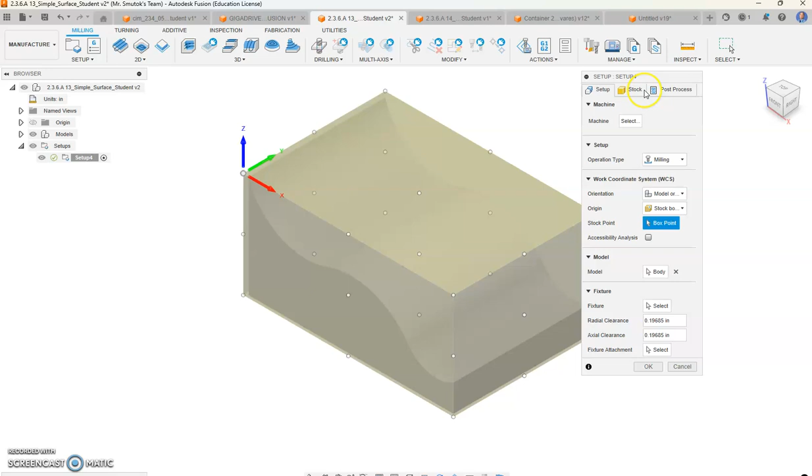So our two-dimensional toolpaths, which is everything over here in this tab, relies on the bottom surface being flat. Three-dimensional toolpaths is what you're going to need for this ski hill and for the next model too, which is a complex surface. So I'm going to jump right in here and we'll do a setup quickly. And I'll get right into it with the 3D.

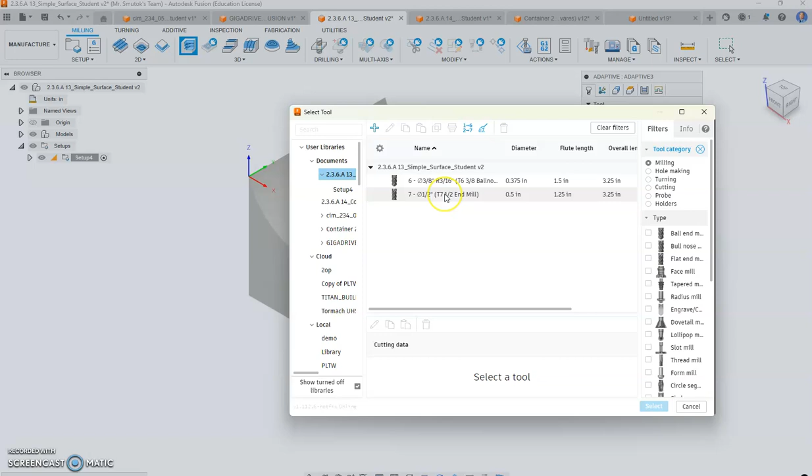I like to use adaptive clearing, and what this strategy is going to do is it's going to quickly remove a bunch of material. Speeds and feeds for simulation is okay. Geometry, you don't need to actually select anything. You could select these guys here. You could choose faces, and then we'll select these faces. Our action is going to be to machine the surface. I'll choose OK.

Essentially what this is going to do is it's going to look at the part, figure out what it thinks you want to machine, and then figure out the most efficient way based on tool geometry and tool diameter using this right here called optimal load. So if you don't have optimal load selected or adaptive selected, what you're going to get is what you see on the bottom left there, where you've got a large amount of your tool engaged in your material.

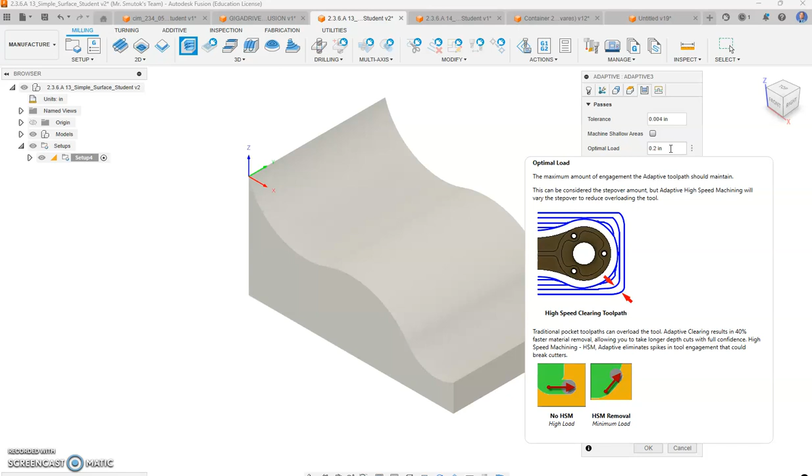Well, that is okay if you're not cutting very deep. That's okay if you're not cutting very fast. But for this, we want to remove this extra material as quick as we can, and we want to not damage our tools when we do it. So we're going to use this, and I definitely want to check off stock to leave. I want to not cut all the way down to my final surface because this is a roughing operation. We are not going to be done after this. We have to go back and fix it or finish it.

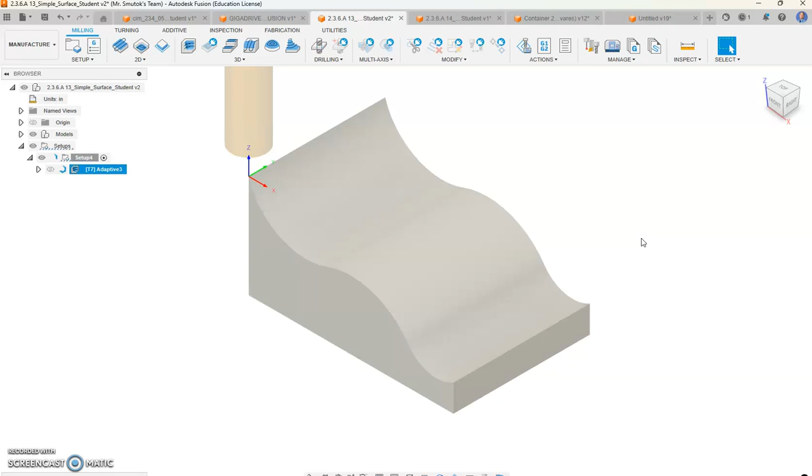So I'm just going to choose OK and let the machine chug its way through this, and you can see its toolpath there. Looks okay. Fusion does a good job of giving you a simulated look of what it's going to look like after it machines all of this. So again, my rapids are in yellow, my greens are my linking, and my blue is my cutting move. So as you take a look through this, you see we're getting most of the material off, but we're leaving some stair steps, which is not our smooth finished ski hill.

To check our machining time, we'll right click and choose machining time, and we can see this takes 4 minutes and 5 seconds to go through based on the speeds and feeds that I didn't adjust. So adjust accordingly with your machine and material and tool selection.

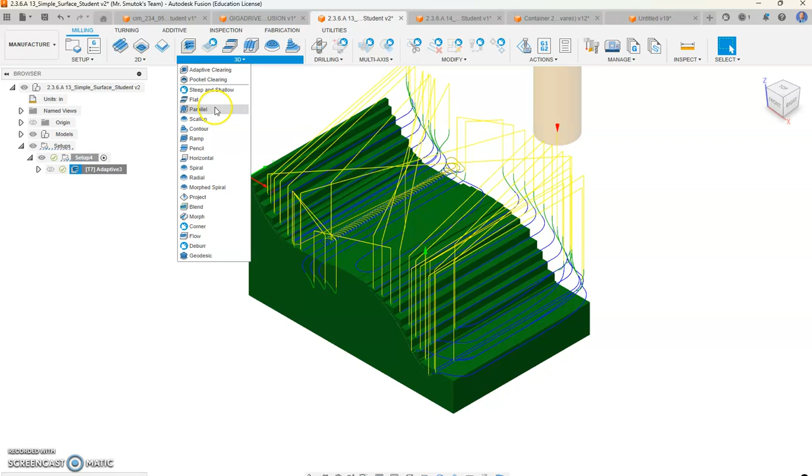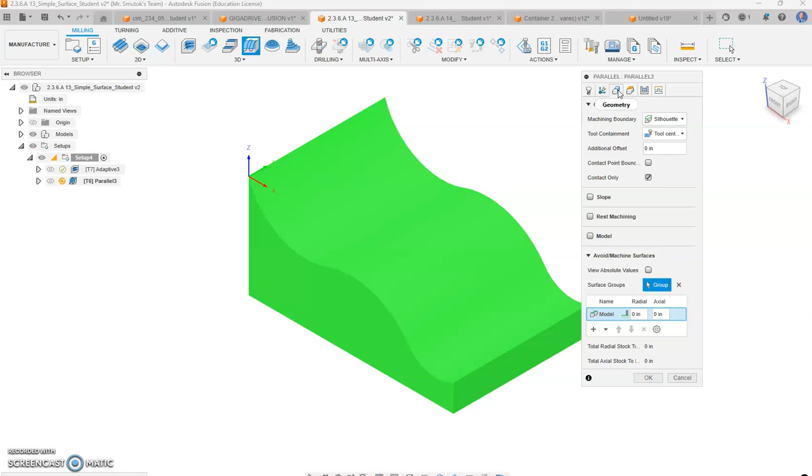Now that we've got most of the material removed, it's time to go back and actually smooth this out. So I'm going to come in here and choose a parallel toolpath. Anytime you're doing a three-dimensional finishing operation, you want to use a rounded tool. So I'm going to switch over to my 3/8 ball end mill. Geometry I'm going to leave alone again. Heights I'm going to leave alone. Passes, you got to play with this step over here. The default for Fusion is probably going to be half of the tool diameter.

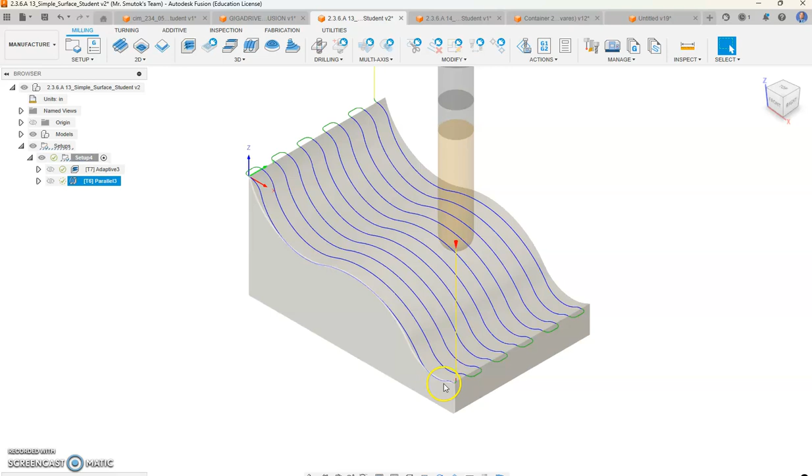So if I do that and I type in 0.1875 for half of my tool diameter, you can see that it's going to do like cutting the grass. It's going to go up the hill, over, down the hill, up the hill, over, down the hill, which is okay. However, if you zoom in on this, you're actually going to leave these cusps here. You're going to leave these ridges. If that's what you want, then you're good. Unfortunately, that's not what we want.

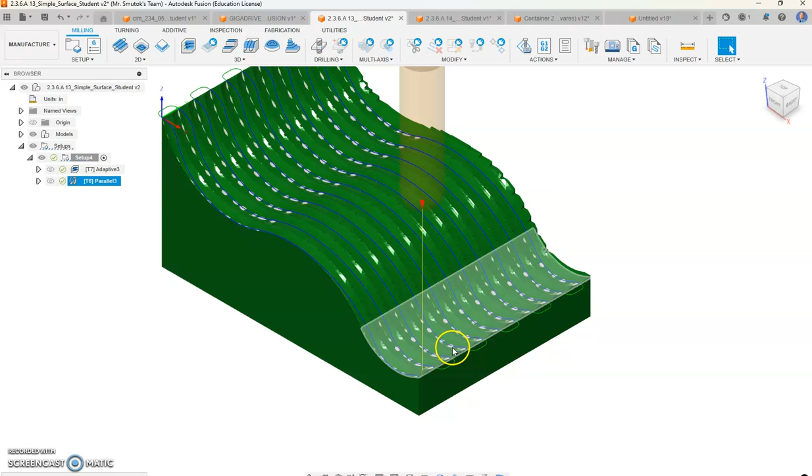We want to try to smooth this out more. So the way we're going to do that is by adjusting our toolpath to make these step over lines closer together. So I'll just come over here, double click to edit my toolpath, come over to my passes, and I'll change that to say 20 thousandths. Now you can see it's going to go up the hill, down the hill a lot more times, which is going to give us a smoother surface.

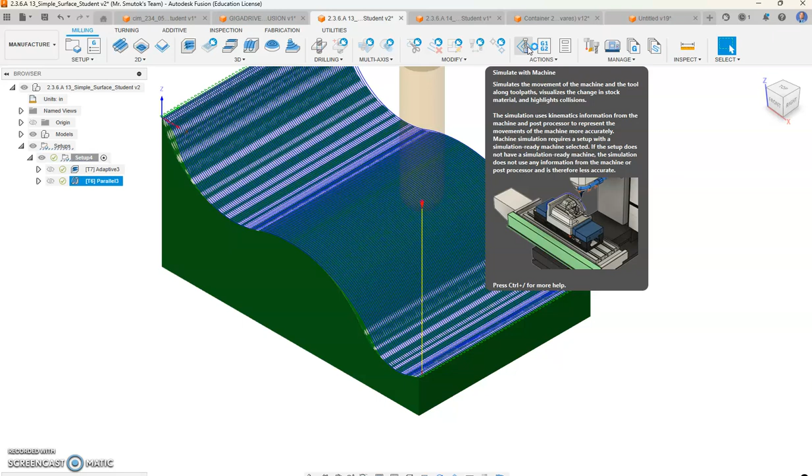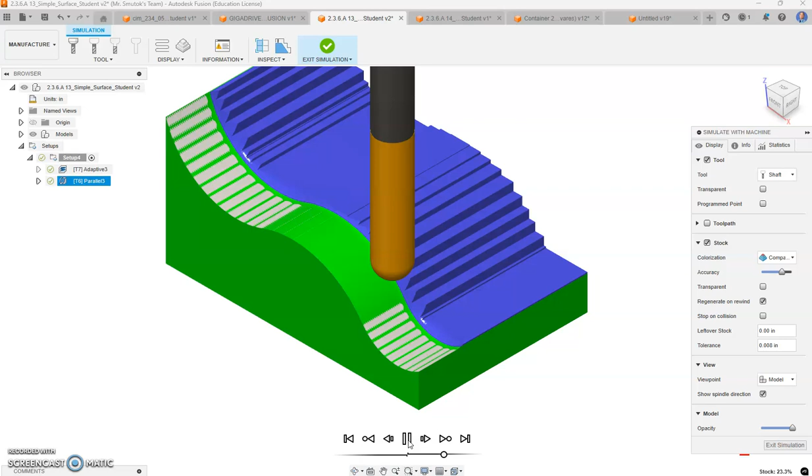So if I simulate and run through this, I'm going to try to speed this up a little bit. You can see it's not cutting a whole lot of material at once. It's making a bunch of passes up the hill and down the hill, but its step over is really small, 20 thousandths of an inch. So it's going to take a little bit longer, but your surface finish is going to be a whole lot smoother. There's no way around this. If you want a smooth surface finish, you have to spend the time.

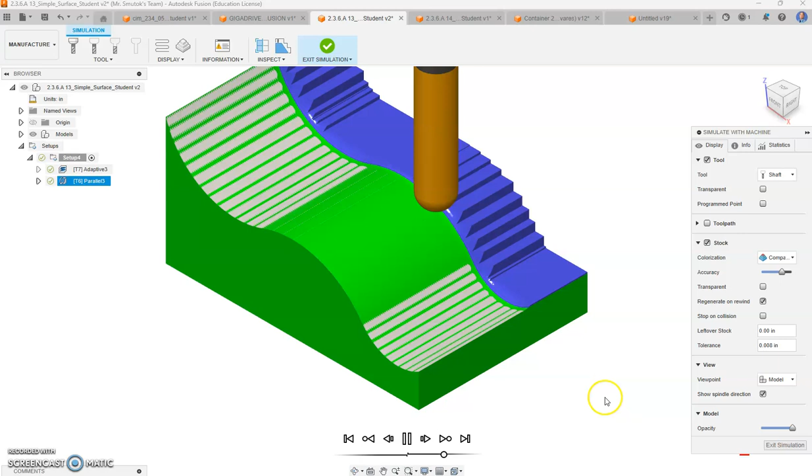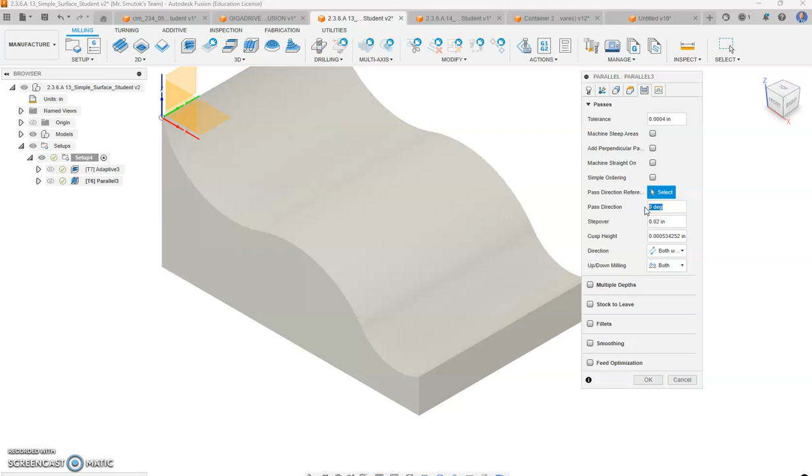Alright, I just want to show you one other thing in this video. Let's say I didn't want to go up the hill, down the hill. What if I wanted to go across the hill? Pass direction. So instead of 0, if I change that to 90, it will recompute my toolpath and go across the hill. Same step over, 20 thousandths. And now it's taking its time here. Oh, there we go. Oh no, this isn't good.

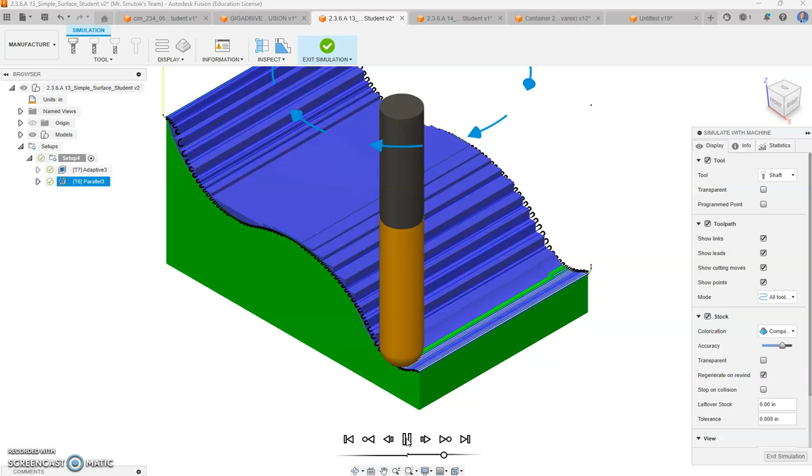Alright, we're back after the freezing. So you can see instead of going up the hill, down the hill, it's going across the hill. And you can play with these settings, change that angle to 45 or 30 or 10 or whatever you want.

The name of the game here with the 3D is play with the tools, play with the different operations that you have, play with the settings in there. I generally only mess with step over or pass direction to get what you want. So that takes us through the ski hill.